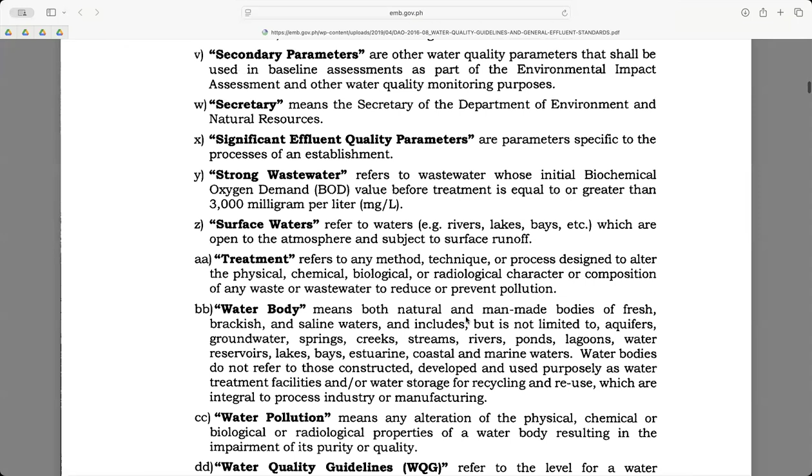One is the classification of water bodies, as exemplified in Section 5 of this department order. The water body classification and usage of fresh water is determined in Table 1: Class AA, Class A, Class B, Class C, and Class D. Table 2 of Section 5 provides the water body classification and usage of marine waters: Class SA, Class SB, Class SC, and Class SD.

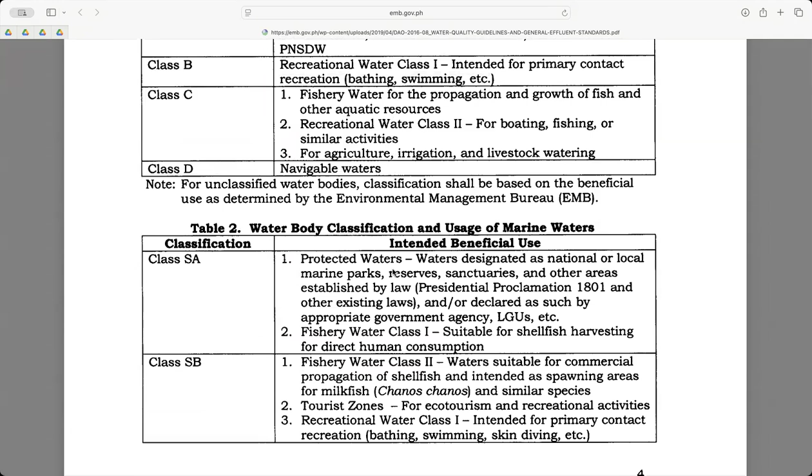Now there are other classifications of water bodies aside from fresh surface water and marine waters. It also includes groundwater. Of course it is not reflected in this department order, but always remember groundwater is also considered fresh water.

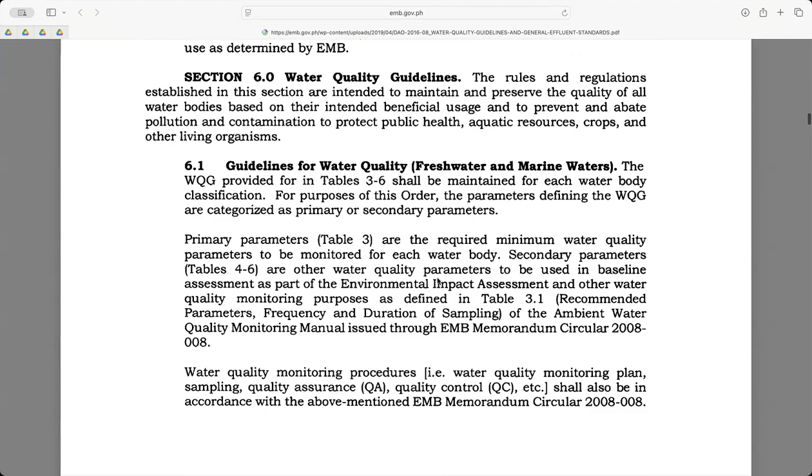Now, the water quality guidelines are ambient concentration limits, as exemplified here in Section 6 of DAO 2016-08. I quote: the rules and regulations established in this section are intended to maintain and preserve the quality of all water bodies based on their intended beneficial usage, and to prevent and abate pollution and contamination to protect public health, aquatic resources, crops, and other living organisms.

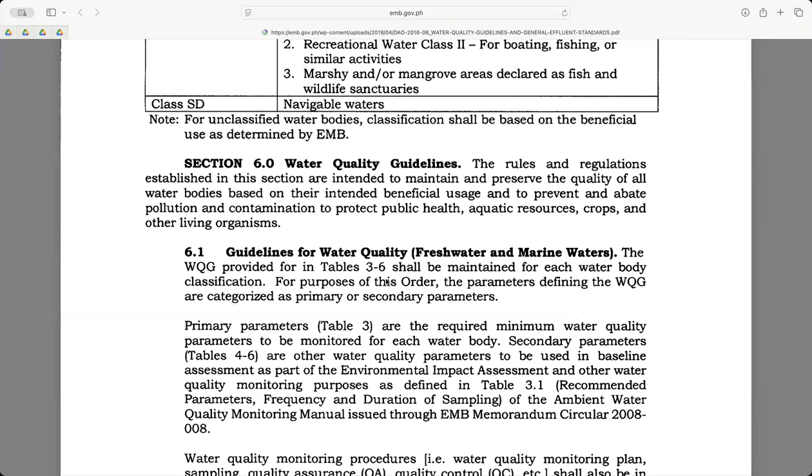So the water quality guidelines are ambient concentration limits for various physical, chemical, and biological parameters like dissolved oxygen, BOD, heavy metals, and coliform, that must be maintained in a water body based on its classification. Here we have Table 3 of DAO 2016-08: the water quality guidelines for primary parameters. Also you have Table 4, Table 5, and Table 6.

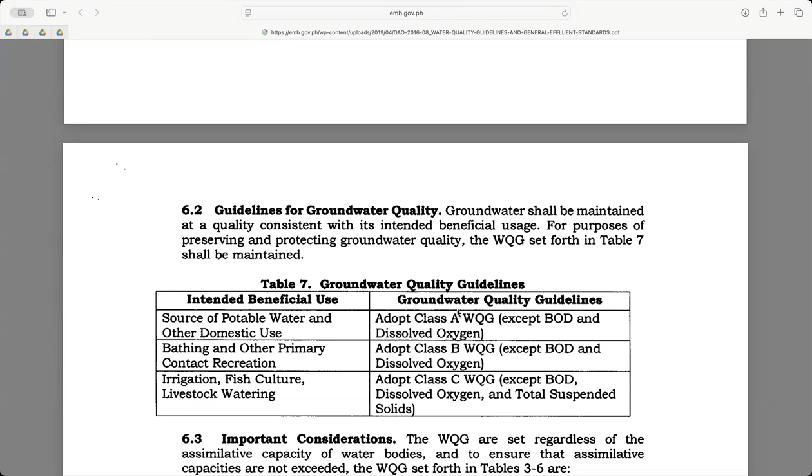We need to ensure that the quality of our ambient water is beneficial. The goal is to protect the designated beneficial use of the water—for example, fishing, drinking water, recreation. Now, the water quality guidelines as reflected in Table 3 are for primary parameters.

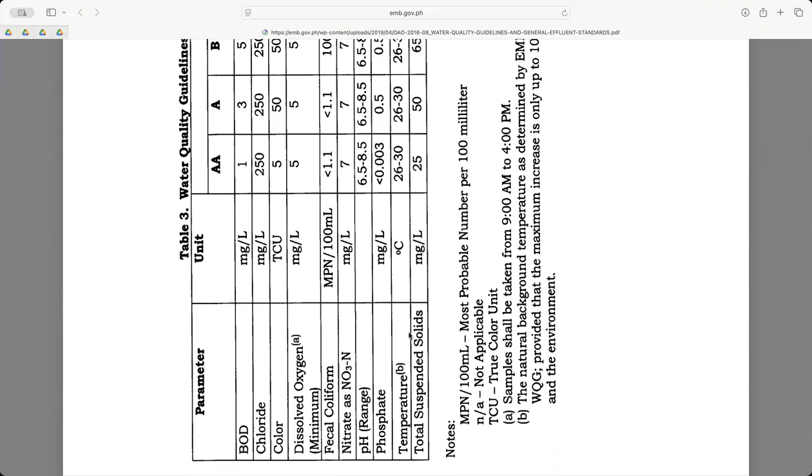For example, the allowable fecal coliform level based on Table 3 for Class C water is 200 MPN per 100 mL. So we can ensure that the quality of the water for Class C water, for beneficial use, is protected.

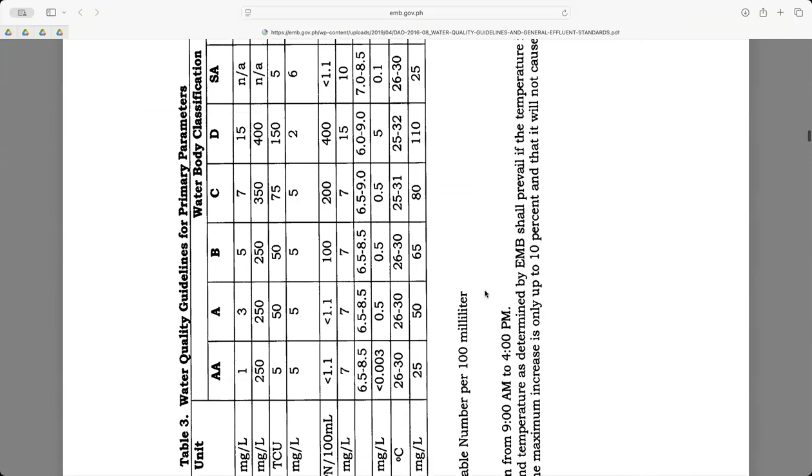Class C water is for fishery water, for the propagation and growth of fish and other aquatic resources. Class C is also classified as recreational water class, for boating, fishing, or similar activities. Also, Class C is for agriculture, irrigation, and livestock watering. So the water quality guidelines, especially in Tables 3, 4, 5, and 6, will protect the designated beneficial use of the water.

Again, for example, the allowable fecal coliform level is much stricter for Class AA, which is for drinking water, than for Class C, which is for agriculture, irrigation, and fishery.

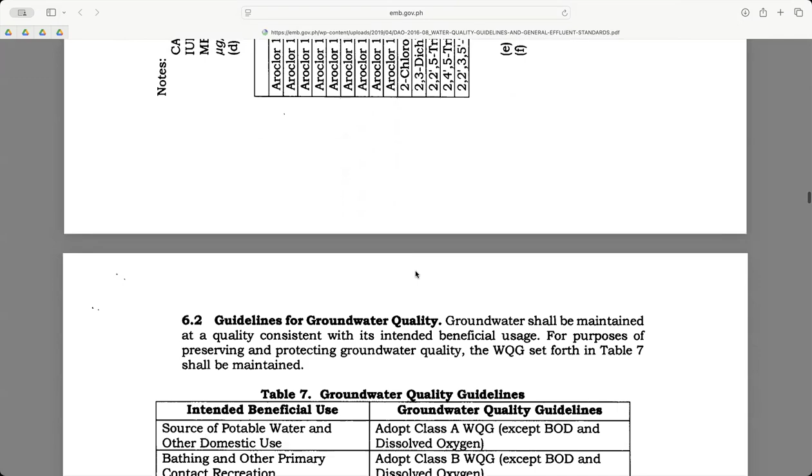Now, in DAO 2016-08, especially in Section 7, provides the general effluent standard. The general effluent standards are maximum allowable limits for pollutants that can be discharged from any point source. So, for example, we have an industrial pipe sewer outfall—we set maximum allowable limits for pollutants to be discharged into a receiving body of water.

So the general effluent standard, as exemplified in Section 7, applies regardless of the classification of the receiving water body. It is the minimum national standard all discharges must meet. The key principle here: if the general effluent standard is not enough to protect the specific water body classification, a stricter specific effluent standard can be imposed by the DENR on a case by case basis.

So what are the important points in the general effluent standard? The key parameters, significant monitoring parameters by industry category. The Department Order 2016-08, or the General Effluent Standard, sets limits for these significant monitoring parameters per industry category or PSIC code.

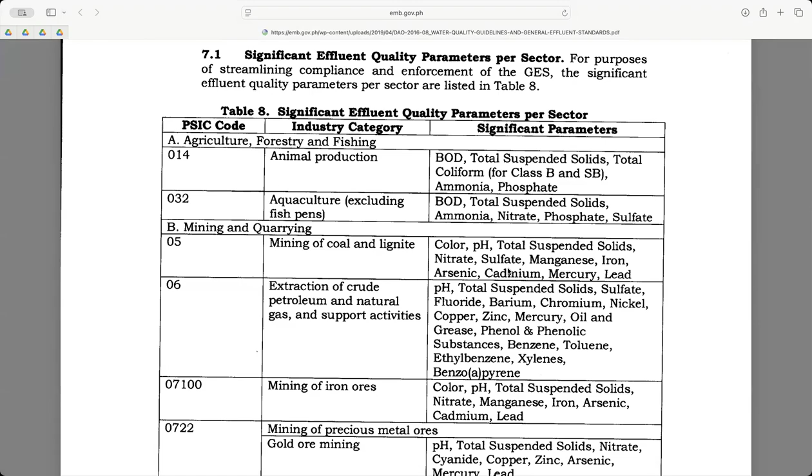There are parameters to be monitored, especially conventional parameters like biochemical oxygen demand or BOD, total suspended solid or TSS, oil and grease, pH, temperature. Of course it also includes nutrients like phosphate and nitrate, heavy metals like chromium, cadmium, lead, and mercury, and microbiological parameters such as fecal coliform and total coliform, and other toxic substances like cyanide, phenol, and sulfide.

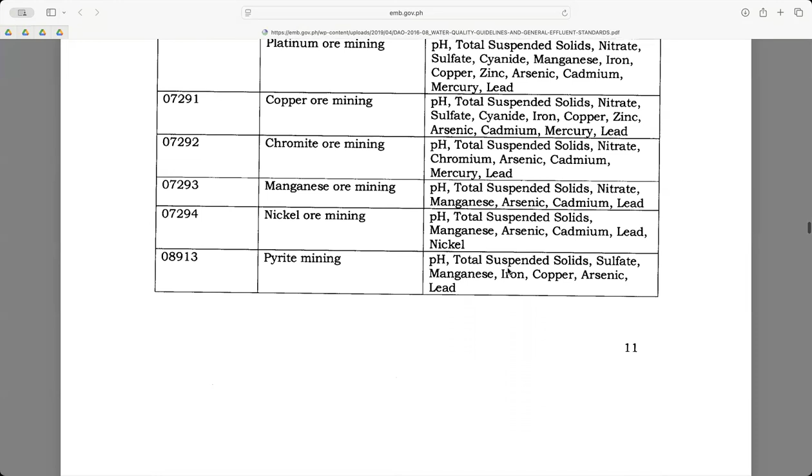So it is mandatory for all dischargers, the operators and owners of facilities, to comply with the standards set by DENR.

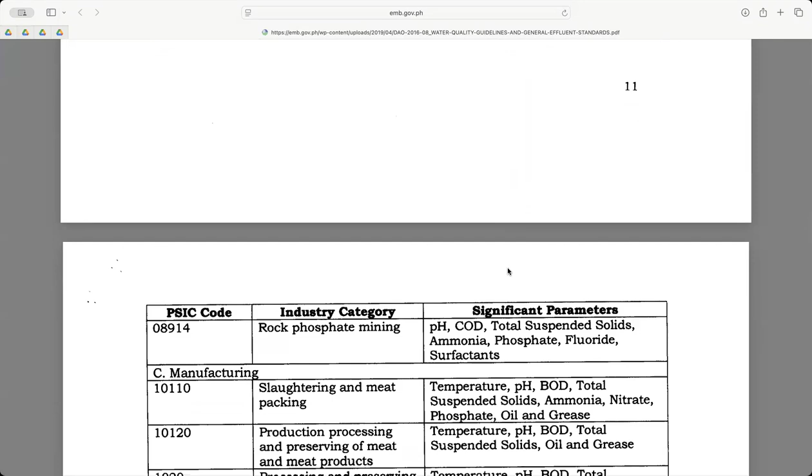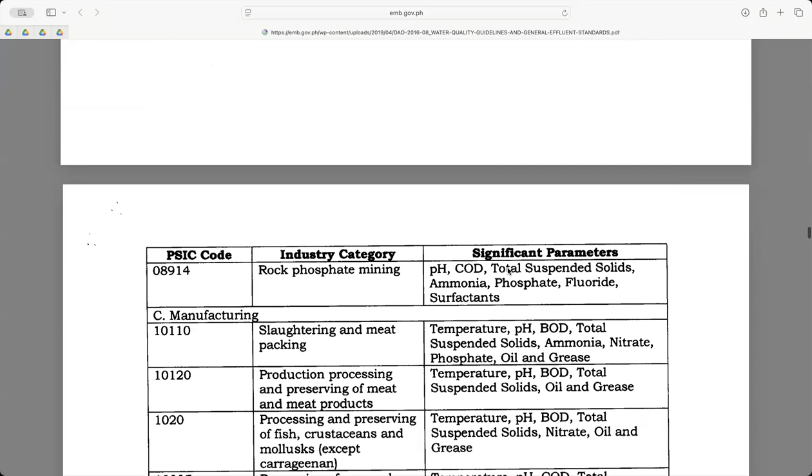Now, to be regulated under this department order, all facilities discharging wastewater must secure a water discharge permit, as exemplified in Section 14 of DAO 2005-10, or the IRR of the Philippine Clean Water Act. The wastewater discharge permit will specify the quantity and quality of the effluent.

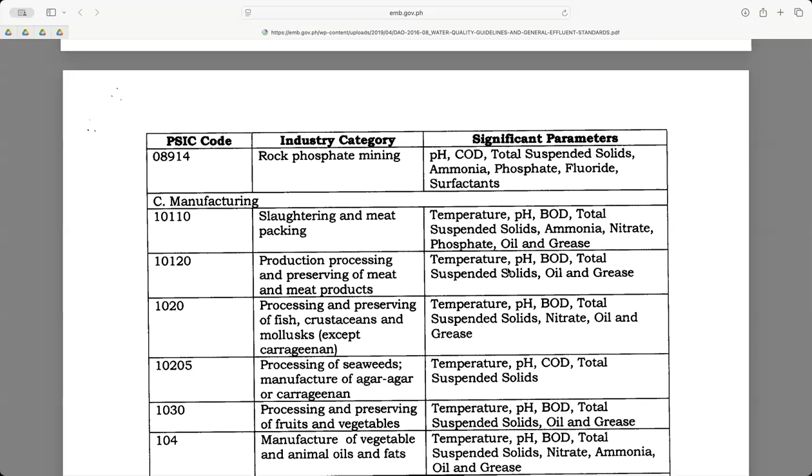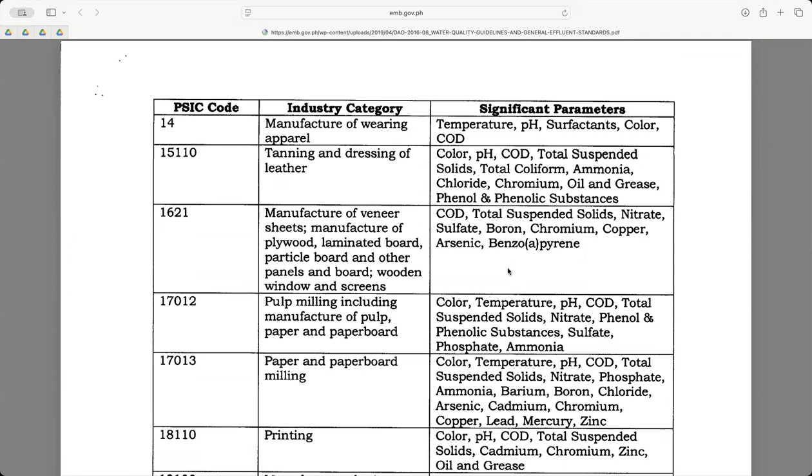The discharge permit shall be secured from the concerned government agency, the DENR Environmental Management Bureau, and/or the Laguna Lake Development Authority. The owners and operators of facilities must submit a report to showcase the compliance of the establishments to the standards set by DENR through prescribed self-monitoring and reporting.

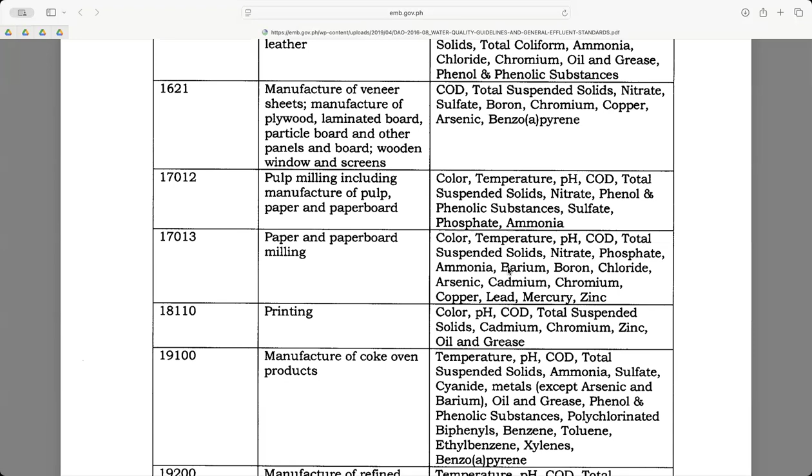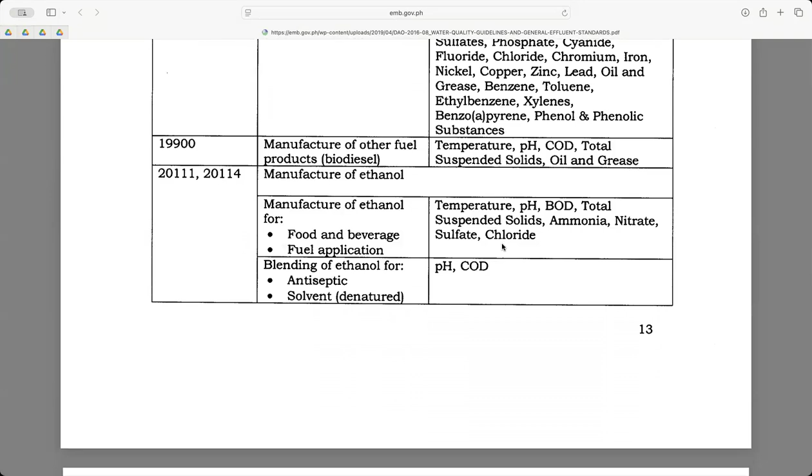Permittees, the owners or operators of facilities discharging wastewater or treated water, are required to conduct regular monitoring of their effluent and submit a discharge monitoring report. It is advisable for owners and operators of facilities discharging regulated water pollutants to use appropriate pollution control technology to consistently meet the effluent standard.

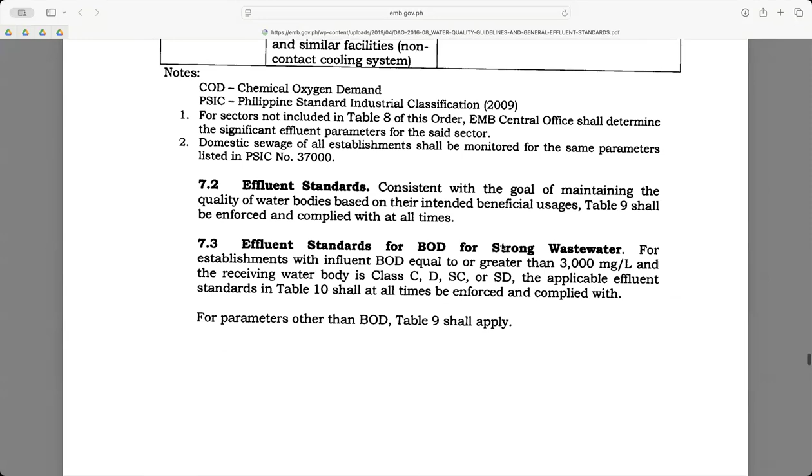So there are standards set by DENR, as exemplified in Table 9, page 20 of DAO 2016-08. The appropriate pollution control technology will ensure that the quality of the effluent passes the standard set by DENR, as exemplified in Table 9. Like for BOD, we have 50 milligrams per liter for Class C receiving water body.

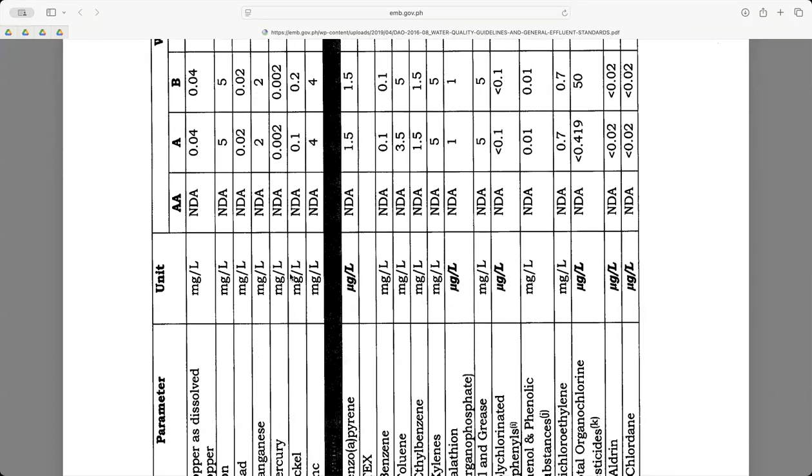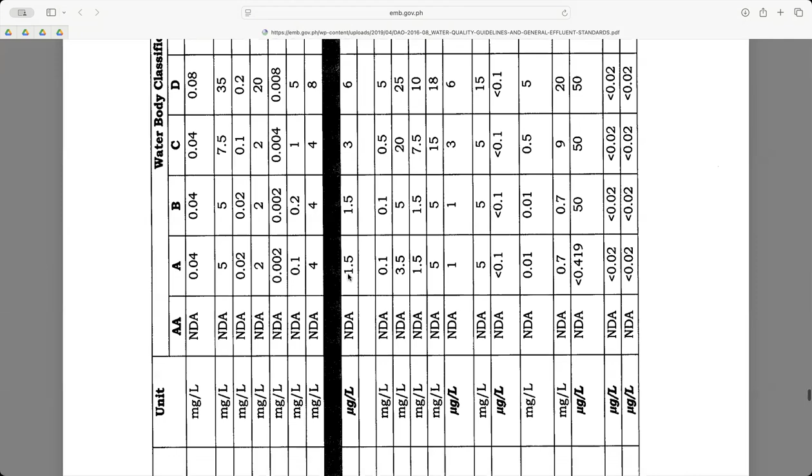Now, there are prohibited acts exemplified in DAO 2005-10, or the Philippine Clean Water Act rules and regulations. The prohibited act, among many, is discharging regulated water pollutants without the discharge permit, and of course, exceedance to the standards set by DENR.

DAO 2016-08, in summary, otherwise known as the Water Quality Guidelines and General Effluent Standards, establishes the framework, the classified water, and the set standard for ambient water and effluent to protect the receiving water body. DAO 2016-08 imposes maximum permissible limits or discharge limits on all polluters as the first line of defense.

Compliance is enforced through the permit and monitoring system. So you are to showcase your compliance to water quality guidelines and general effluent standards through your discharge permit and submitted self-monitoring report. Thank you very much for your time listening.